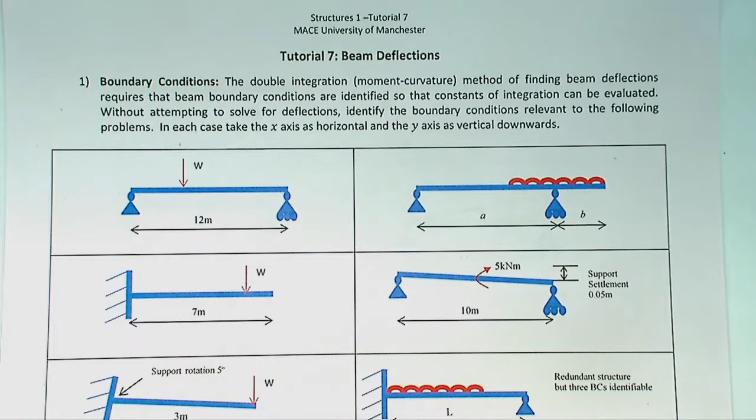Okay, so let's start with looking at the examples from beam deflection. The first set of problems asks you to identify the boundary conditions, because that would be required when we do the beam deflection calculations. So this is asking you what the boundary conditions are in those cases.

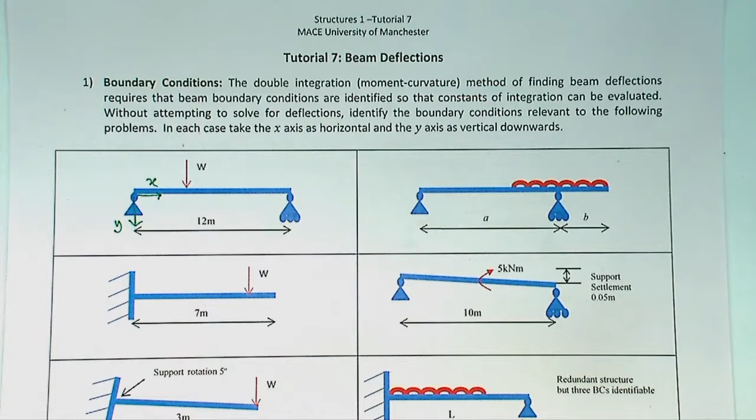So the first problem is asking - you have got a simply supported beam with a load in the span - and it is asking what the boundary condition is. In each case, take x as the horizontal, so this is the direction of x, and y-axis is vertically downward. So this is the axis system for all the cases. X is acting from left to right, y is acting vertically downward.

Now let's have this as an interactive session. What do you think the first case would be? So the first case is shown as follows. So this is the - what do you think the boundary condition would be in this case?

Go on, suggest something. Boundary conditions are determining deflection—both the bending moment and the deflection will be zero at some point. It will be maximum when they're at the very position below, right? But we don't need all of it. We probably need just two displacement type boundary conditions. You are right that bending moment and shear force, if known to be zero at some point, is also a known condition we sometimes use. But in this case, we are looking at where the displacement and rotations are zero—these are the boundary conditions required for this type of problem.

So do you know any displacement or rotation in this case? I'm giving you a clue: at x equal to 0, which is the left hand end, displacement is 0 because there is a support. And at x equal to 12 meters—look at the problem on the other side of the board—at x equal to 12 meters, y equal to 0. So that means the other end is also 0.

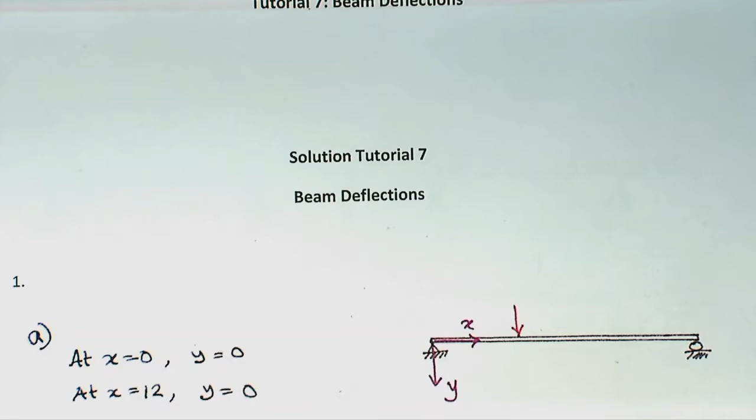What do you think would be the boundary condition for problem number 2, which is the problem over there on the right hand side? What do you think the boundary condition would be? There will be some questions like this in the test anyway, so might as well say it.

What are the known boundary conditions? Any displacement or slope that you know? At x equal to 0, y equal to 0, absolutely. And at x equal to a, y equal to 0. Make sure that you get these ones.

What about the third one? Again, x should start from this end, and y is vertically downward at the left hand end. So what are the known displacement or slope that you know? At x equal to 0, y is equal to 0. That's good—at x equal to 0, that means at the support, displacement is 0 or deflection is 0. What are any other things?

X is equal to 7, but that's going to be the location. There is x equal to the distance between 0 and w, which is at w there will be the highest deflection. Not sure—what about at the free end? If it deflects, it will continue to deflect. Oh wait, the highest deflection is at the free end.

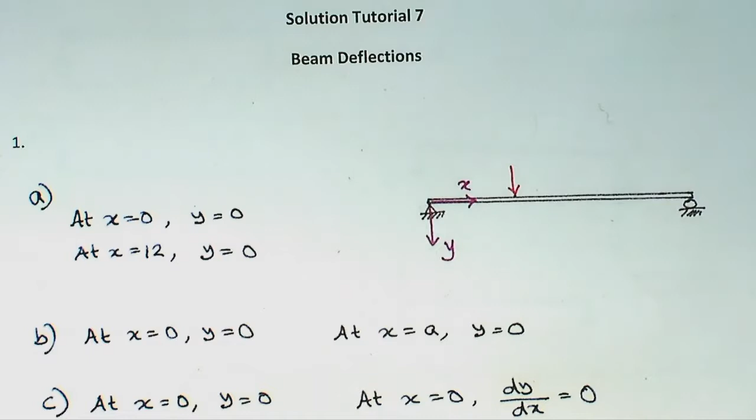Yes, absolutely—at the left hand end and the support, the slope or rotation is 0. dy dx is 0. So at x equal to 0, y equal to 0, as you said, and as you have rightly said, at x equal to 0, dy dx, which is the rotation or slope, is 0. Absolutely right—so a fixed end or a built-in end will have rotation 0. So that's the known condition. Having a maximum quantity would not make sense unless you find out what that maximum value is—you need the known value as the boundary condition. And boundary conditions here we are talking about in terms of displacement or rotations, because that's what we are finding in the deflection equation.

Bending moment and shear force you may know. For example, in this problem on the right hand side, at the free end, bending moment is 0, shear force is 0, because it's a free end—it cannot have any bending moment or shear force there. And you also know the left hand side would probably have the maximum bending moment. But this doesn't help you when you're trying to find the integrating constant from the deflection equations. So go for known places where you know the deflections or where you know the rotation—these two are the things you need to look at in these problems.

Okay, what about problem 4, which is in there? Okay, anybody wants to go first for this problem?

No? So what are the known boundary conditions in this case? Now of course as before, at x equal to 0, y equal to 0. That means there is no deflection due to fixed end. But what about any other conditions?

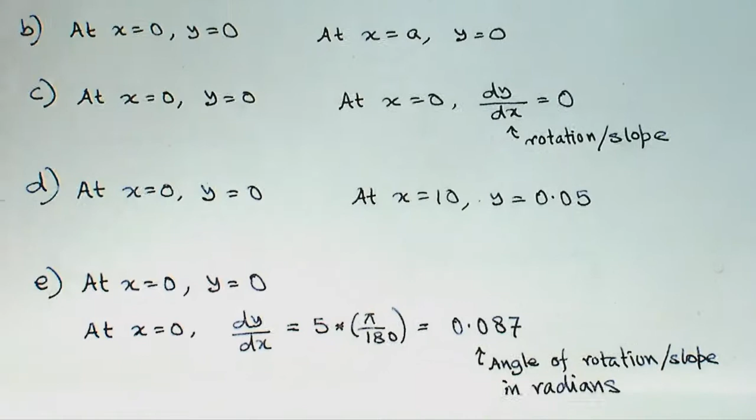Okay. What about problem 6? How many boundary conditions do you know in problem 6? Okay, I want some answer. First one from this side. Okay, anybody from this side, give me a boundary condition.

What do you know in terms of the deflection or rotations by looking at the support structures or the loading or the beam? What do you know in terms of the deflection or rotations? Okay, somebody from this side, okay?

At x equal to 0, at the support, y equal to 0. Very good. Now I go to the other side. You give me another one, okay? X equal to L, y equal to 0, because there is a pinned support.

Okay, middle group, do you have anything else? dy by dx is 0 at x. Okay, dy dx equal to 0 at x equal to 0. So these are the three boundary conditions.

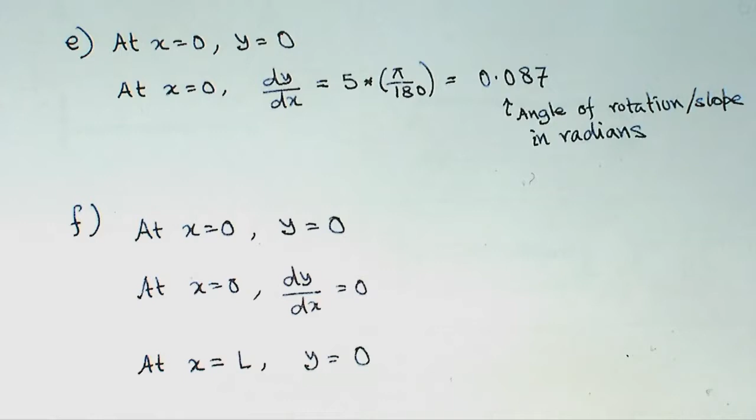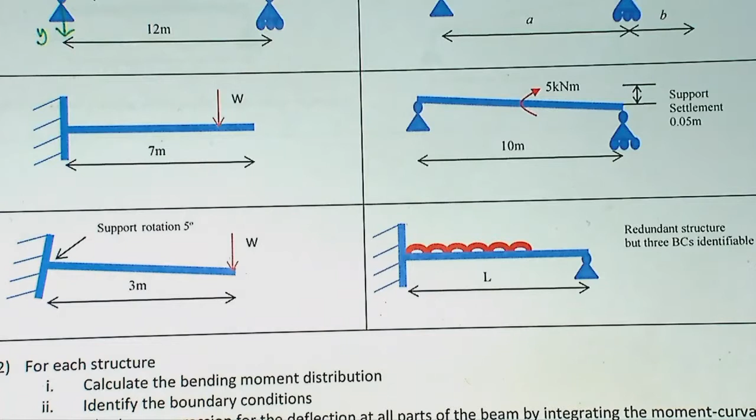So let's look at problem number 1. So problem number 1 is this beam.

Okay, so 2 kilonewton per meter over 5 meter distance. So that's the beam, and it is asking us to find out the bending moment distribution. Now there is only one load, so it is relatively easy.

So I take a section at a distance x and find out what would be the bending moment distribution. Now we know there is this 2 kilonewton per meter load. To calculate the bending moment distribution, I need to find out what are the support reactions.

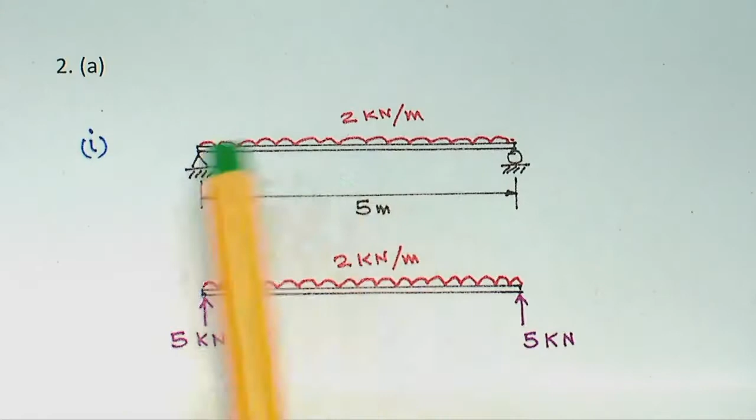So to get the support reactions, we can do a free body diagram and find the support reaction. So the total load is 10 kilonewton - 2 kilonewton per meter over 5 meter.

Total load is 10 kilonewton, and it's a symmetric beam. So half of it will go over the left hand support, other half over the right hand support. So 5 kilonewton each. Now it is relatively easy for me to find out the free body diagram.

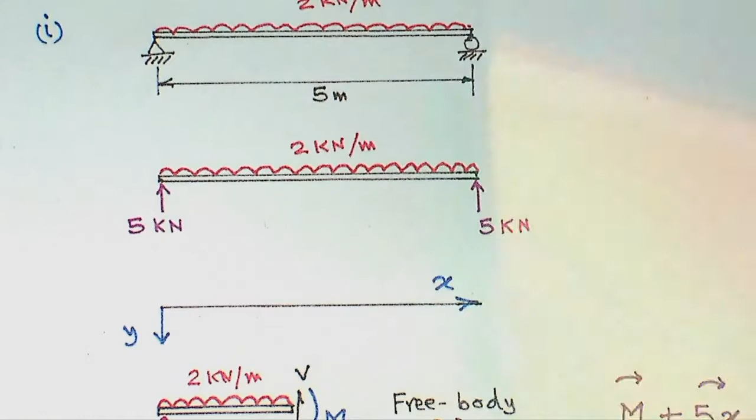We take x going from left to right and y vertically downwards. So if I take a cut or free body diagram at a distance x from the left, say this distance is x and that is 5 kilonewton, and then my shear force and bending moment diagram as shown.

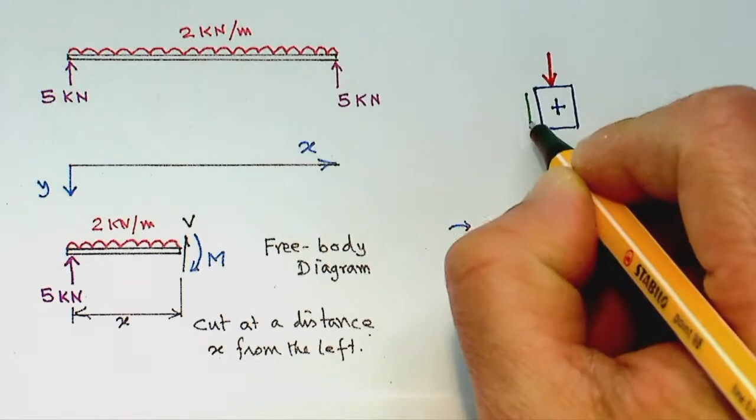Do remember the sign convention we are mostly using in this case. This is an element on the left and right, and the positive sign convention means I will have a load going downward, shear force going down on the left, up on the right, and bending moment we assume a sagging bending moment is positive. So these are the positive sign conventions we are using.

Now, that means on the right hand side I put this shear force going up, that's the right of the cross section, and bending moment in this way. And then I draw the equilibrium equations for this case. So this moment...

Whenever we are doing the equilibrium equations, I can use clockwise or anti-clockwise. When you do the equilibrium equation, summation of moment equals 0, this sign convention does not follow, because left or right is related only to the bending moment, which is internal stress. The internal stress has some form of sign convention like this, which is different from what we do in terms of the summation of all the moments being 0 or not.

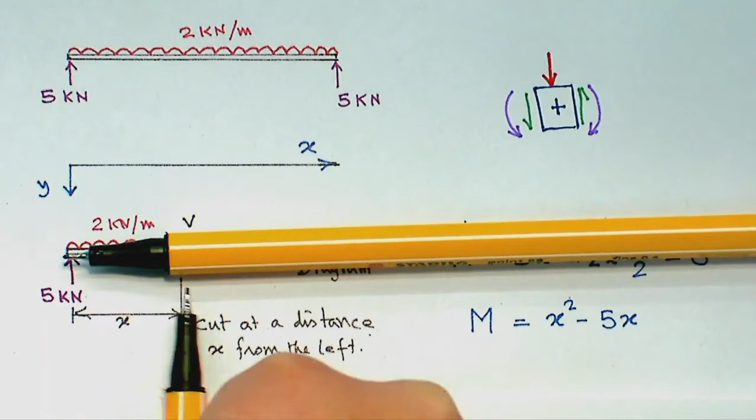So this moment M is clockwise, so I am using a plus sign M. Moment due to the reaction force at the left hand support, I am taking moment about this point, so I hold my bar like that, and consider how this 5 kilonewton is rotating my bar. Consider the pivot point where you are taking your displacement. This is my pivot point, because that's where I am taking the displacement for the moment equilibrium.

So 5 kilonewton load will rotate my beam in this direction, as if going in a clockwise fashion. What is the moment amount? 5 times x, the force times the distance. So that's why with the plus sign, because it is a clockwise moment.

What about this 2 kilonewton per meter load? What is the total load? Total load is 2 kilonewton per meter over a distance x, so the total load is 2 times x. And where does it act? This is a uniformly distributed load, so it will act at half the distance from this side, the middle of this side. So if this is my 2 times x, that will act at a distance x over 2.

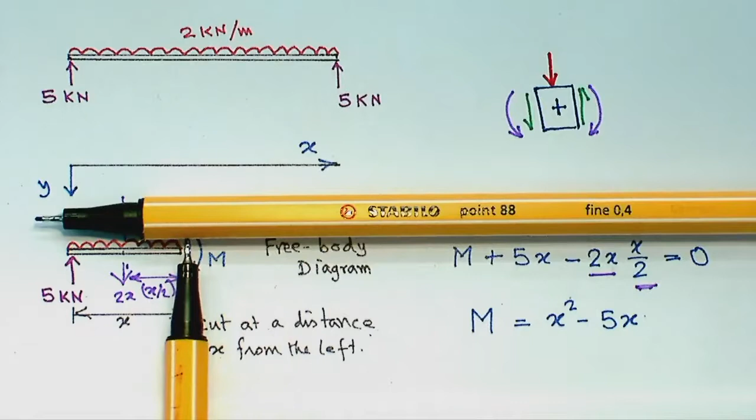Now which direction does it rotate the beam? The pivot point is still there, and this load will rotate the beam in this direction, so this is anti-clockwise, that's why this negative sign. If you do that, then you get m equal to x squared minus 5x.

So that means this expression gives the value of moment at any distance x. Give a quick sense check: if you put x equal to 0, then mx equals 0 minus 0, which is 0. That makes sense, because this is a hinge point, so moment is 0. And also moment is 0 at the other point, because there is also a hinge point.

So if you put x equal to 5, for example, then that will be 5 squared minus 5 times 5, so mx equals 0. Doing a bit of sense check makes sure whether your expression is right or not. You can look at the structure and say that this is the right one.

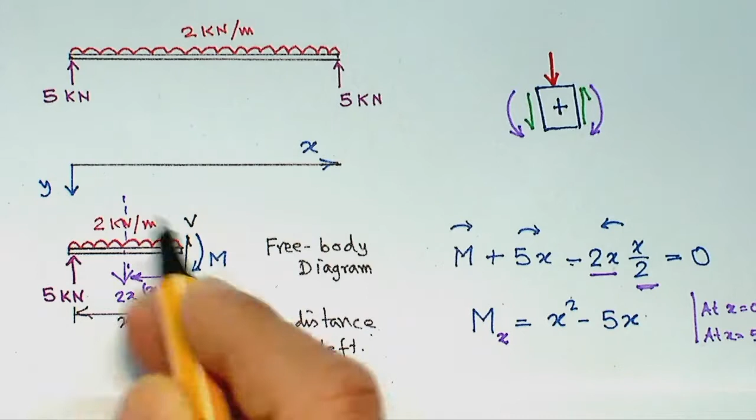Now before going further, if you have been asked to do a shear force expression, how do you do that? So this is the shear force V. You can take an equilibrium equation for this shear force. Let's say positive force upward is positive, because we are doing the equilibrium, so you have to do that. This is the equilibrium of this element we are doing.

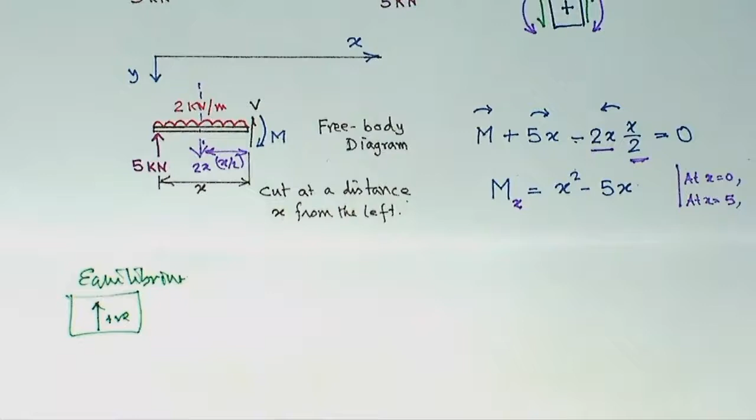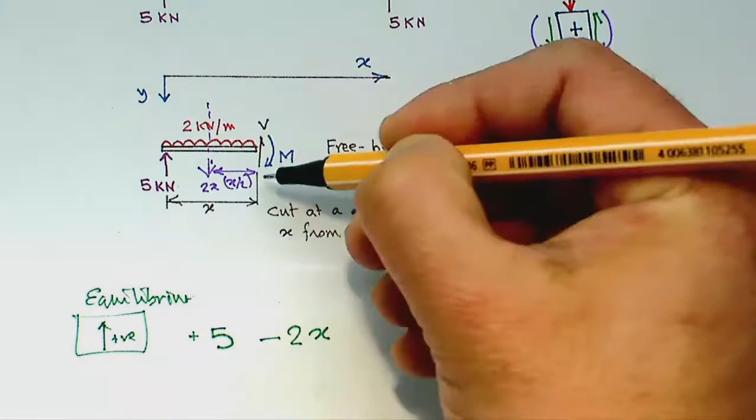5 kilonewton is going upward, so I put that as plus 5. 2 kilonewton per meter is going downward, and what is the total load? 2 times x, so minus twice x. And V is going upward. These are the three forces in this case, so that is equal to 0.

So V at a distance x. If you write it down in a neat way, Vx would be 2x minus 5.

So if you do a sense check, at x equal to 0, Vx will be equal to minus 5. That means over the left hand support, your shear force would be minus 5, and at x equal to 5 meter, Vx would be plus 5 kilonewton.

That means, at x equal to 2.5, for example, half the span, Vx will be equal to 0. So at the mid span, shear force is 0. This is the expression of shear force. I may ask you to find out the expression of shear force as well.

So this is an expression of shear force at a distance x. But this is not required to calculate deflection. So this could be just an expression for you to find out.

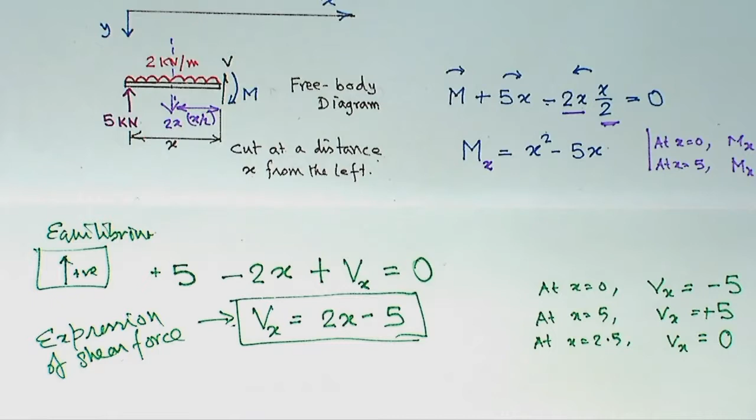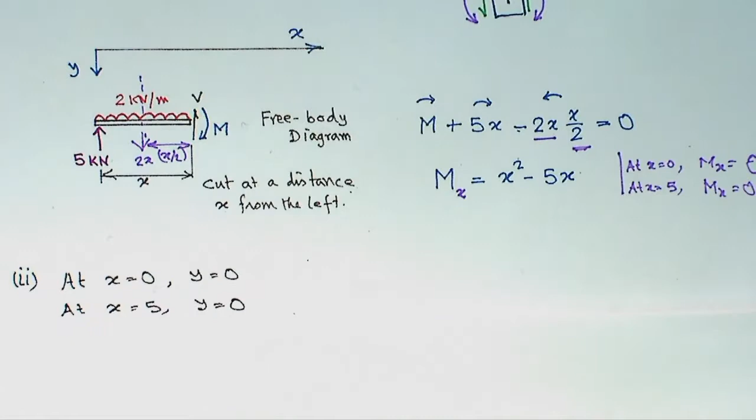So how do we solve this problem? Now the second problem that we have been asked was to calculate the boundary condition. The boundary conditions are: at x equal to 0, y is 0; at x equal to 5, y equal to 0. Third is obtain an expression for the deflection.

So EI d2y/dx2 is M. And what is the value of M? M is, general expression is x squared minus 5x. So we put M as x squared minus 5x.

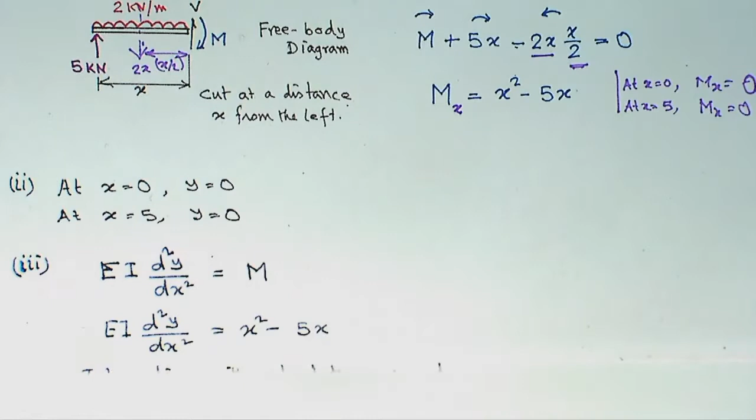And we start integrating. So integrating with respect to x, we get EI dy/dx is x cubed over 3, if you integrate x squared, minus 5 times if you integrate x, x squared over 2, plus c1.

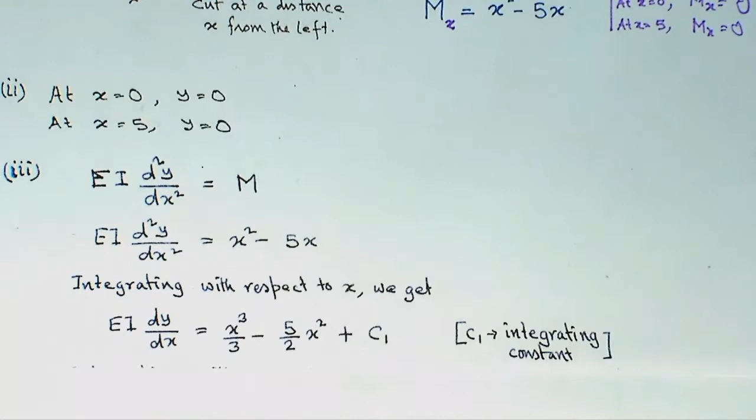c1 is an integrating constant, for example, which we don't know yet. Integrate with respect to x once again, you will get this expression: EI y is x to the power 4 over 12 minus 5 over 6 x cubed, plus c1 x plus c2, where c1 and c2 are the integrating constants.

How do I find c1 and c2? I find c1 and c2 from these two known boundary conditions that I wrote at the top. So I use the first one: at x equal to 0, y equal to 0.

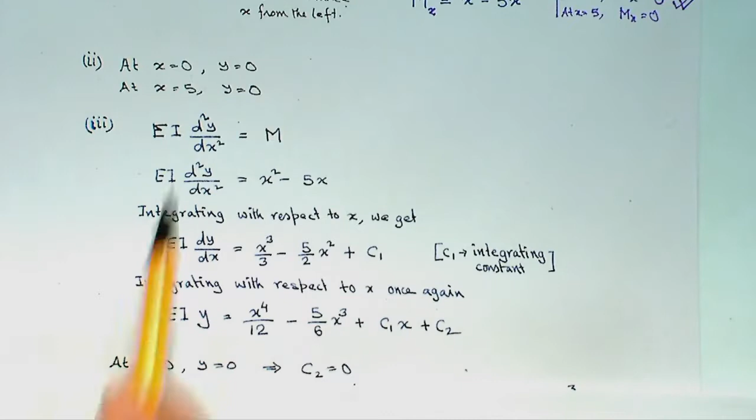So I put that value here. So 0 is equal to 0, 0, 0, etc. So that will give me c2 equal to 0. I use the second boundary condition then, x equal to 5, y equal to 0. Then that gives me the value of c1. So once I know c1 and c2, I write down my expressions of deflection.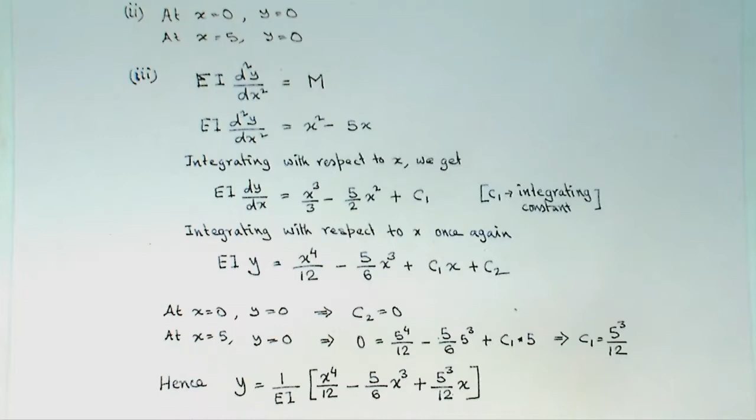So the beam is likely to deflect in this manner, for example like this. So this is the deflected shape. This deflected shape you can find by using this equation.

So you can see if you put x equal to 0, then you find y would be 0. Similarly, if you put x equal to 5, you should get y equal to 0, because that's how you have found c1 and c2. And you can find the maximum one.

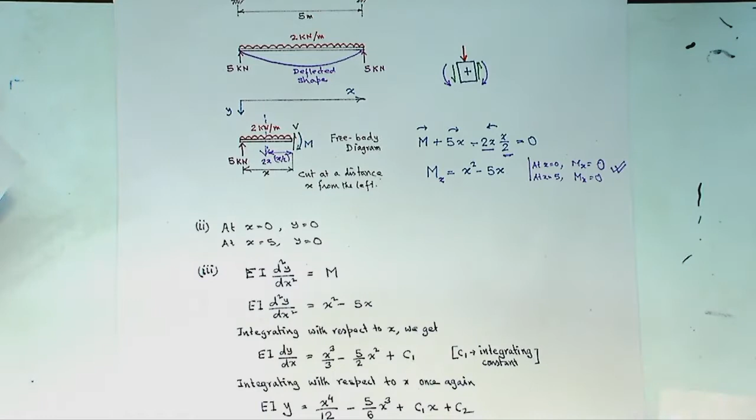And by drawing the diagram, you find that the maximum is at the midpoint, at the midspan. So you put x equal to 2.5, for example, which is the midspan, and that will give you the maximum deflection. So if you want to find out that part, where the maximum deflection would be.

So at the location of maximum deflection, the slope will be 0. Now, of course, in this case, you could use the symmetry and say, okay, midpoint it is maximum, but maximum deflection usually would be related to the slope being 0.

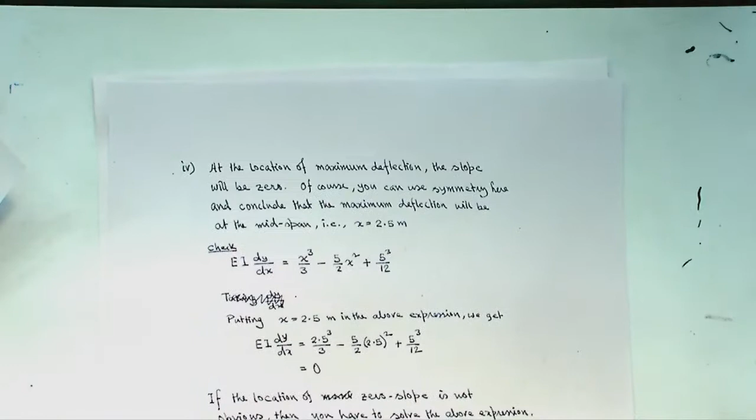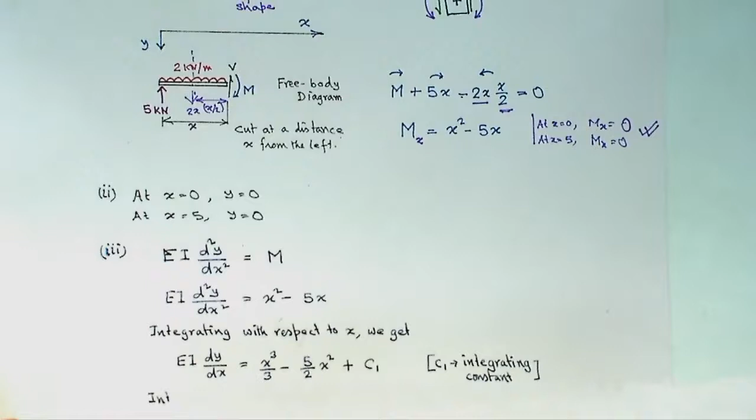Of course, you can use symmetry here and conclude that the maximum deflection will be at the midspan, i.e. x equal to 2.5 meter. So we can check that because we do have the equation of the slope: EI dy/dx is x cubed over 3, etc.

So put values of x equal to 2.5 meter and see whether that is exactly 0 or not, and you will see that it is indeed 0. So at the midpoint, the slope is indeed 0.

So if the location of zero slope is not obvious, say the load was such that you cannot use any symmetry or anything else, then you need to solve this equation in terms of x, put that equal to zero, and find the locations of x where the maximum deflection would be.

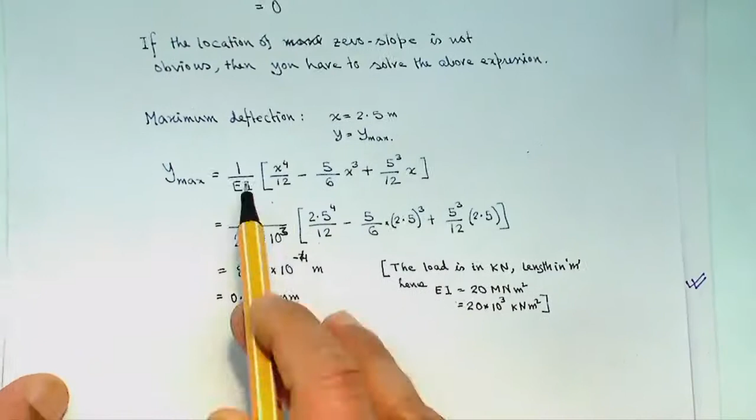So once you know the location, then put the values in and you get the y max. In this case, y max is 0.814 millimeter. Now you need the value of EI, which is given for this problem: EI is 20 mega Newton meter square. So you are getting a deflection, maximum deflection of about a millimeter.

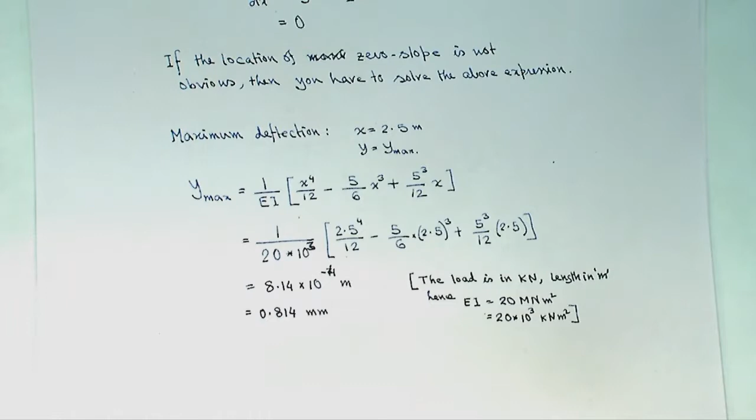Okay, so you can see the deflection is 0.8 millimeter. Now just to put this in context, the assumptions we take are that it is a small deflections problem. The way I have drawn it here is not to scale, of course, because the span is 5 meters and the deflection is 1 millimeter. So that is a very small deflection, and 2 kilonewton per meter is not a small load.

So 2 kilonewton is approximately 200 kilogram of mass per meter length. For example, two people standing half a meter apart, each weighing 100 kilogram. So that's a load. Yes.

I've got a question, I've had this thing squeaking in my mind for days. EI's value. Prove me wrong here. Do you think we should convert EI to kilopascals first before putting it in? No, you use any unit that is consistent.

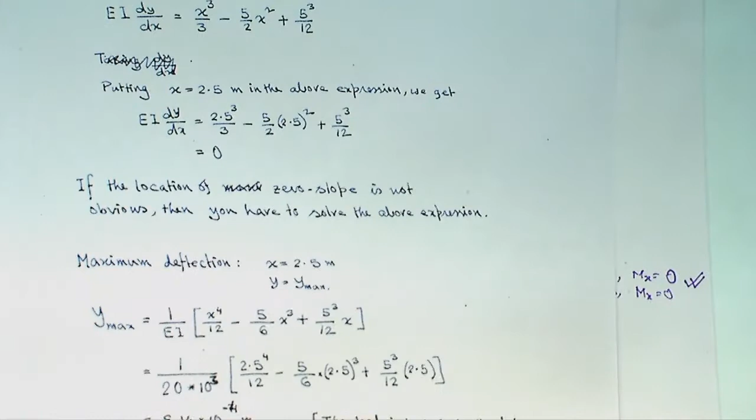So the load is in kilonewton and length is in meter. So I used, in this case, meganewton meter square converted to kilonewton meter square for this problem. Other option is to convert everything to Newton and meter, for example, or Newton and millimeter, but use consistently the same unit for everything. So in this case, as the problem is given in kilonewton and length in meter, I converted EI to kilonewton meter square.

So in this case, are we not considering the self weight of the beam? No, the self weight is possibly taken within that 2 kilonewton per meter. So if there is no uniformly distributed load and we have to consider only the self weight, can we consider self weight as a UDL? Yeah, absolutely.

So the self weight could be included, taken as a UDL, and of course then your inherent assumption is that the cross section does not vary along the length, or it's a prismatic beam, because if that varied, then the self weight would also vary and it wouldn't be uniformly distributed.

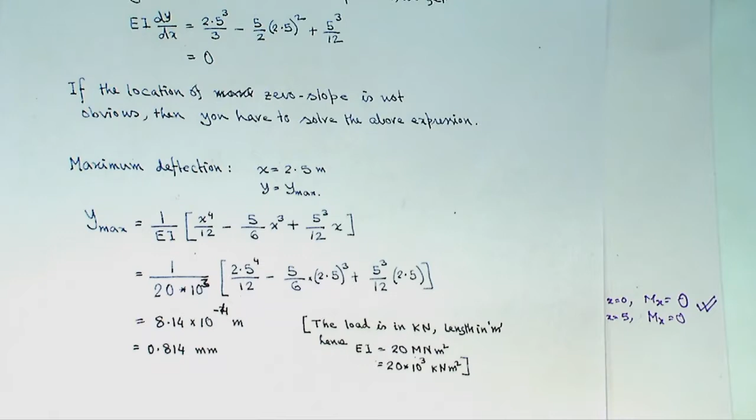Any other questions on this problem? No? Okay, good, so that was problem number 1.

What about problem number 2? Problem number 2 is this problem B here. Why is that given in terms of A? Okay, so no value is given, but it's done in terms of A. It's not to worry. So this is the problem that is given.

The first thing it asks us to find is the bending moment distribution. So what do we do? We first need to find out any unknown support reactions. So draw the free body diagram of the whole beam and find the support reactions.

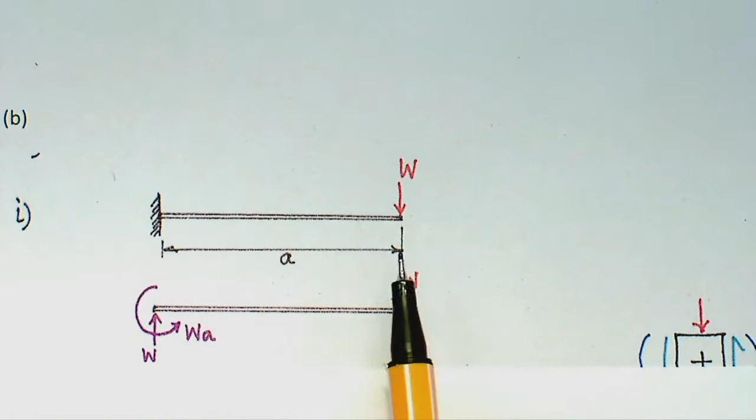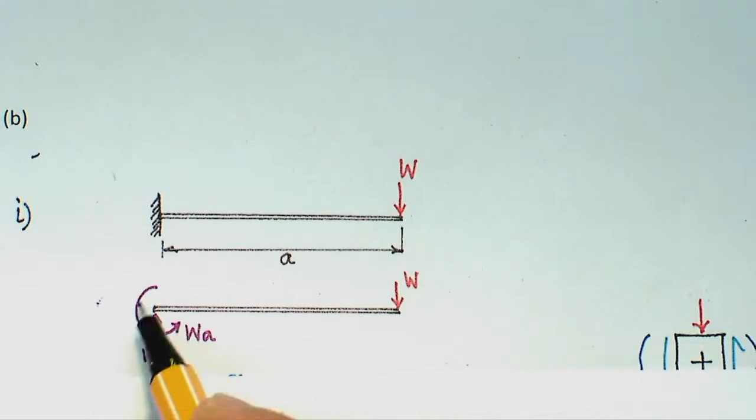If you draw the free body diagram of the whole beam, you will have an unknown reaction force at the support and an unknown moment. If you do the equilibrium, the summation of vertical forces shows that the reaction force going up is W, and the support moment would be W times A. Why is that? Because the load at the free end creates a clockwise moment W times A, which must be balanced by the support. So the support moment must act in the opposite direction, anti-clockwise, and must be W times A.

Now you probably haven't done many of these cantilever problems, so make sure you familiarize yourself and do some more. In first year, mostly you will get either the simply supported type or the cantilever type, and in some cases an overhang, but you wouldn't get any statically indeterminate structure. So these are primarily the two types of structure. Make sure you are familiar with both sets, a simply supported or a variation of it, or a cantilever. Cantilever could be vertical as well as horizontal.

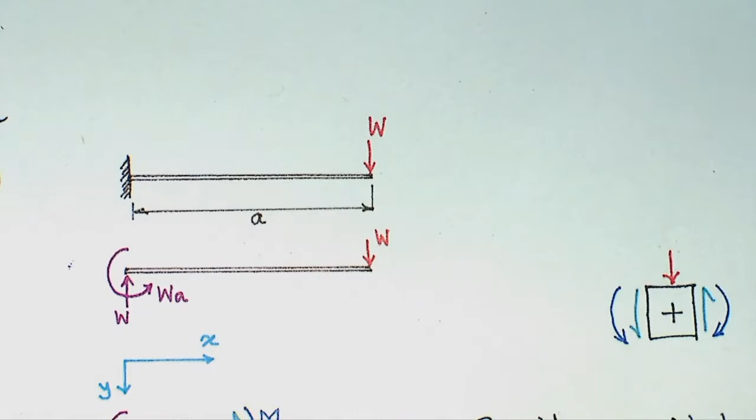So the shear force diagram for this, if we take a cut at x where x is less than a, the shear force diagram is going to be V plus W. So why don't we do the shear force diagram? Let's say I take a cut at a distance x, something like this. Then I have got a shear force V going like this, and a moment.

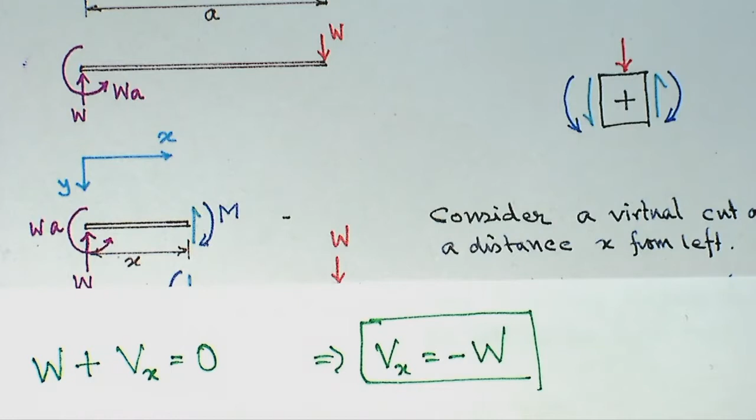As soon as I make a cut, a moment acts in this way. So what is the shear force? Now the shear force comes from vertical force equilibrium. W is upward, so that is W going up, and shear force according to my sign convention is also upward. So W plus V at x equals 0, which gives Vx equal to minus W. So that is my shear force expression. It will start with a negative value at x equal to 0 and continue, because this does not depend on any x value. So the shear force for this beam would be continuous at the same value, negative W, throughout. So this is the shear force diagram.

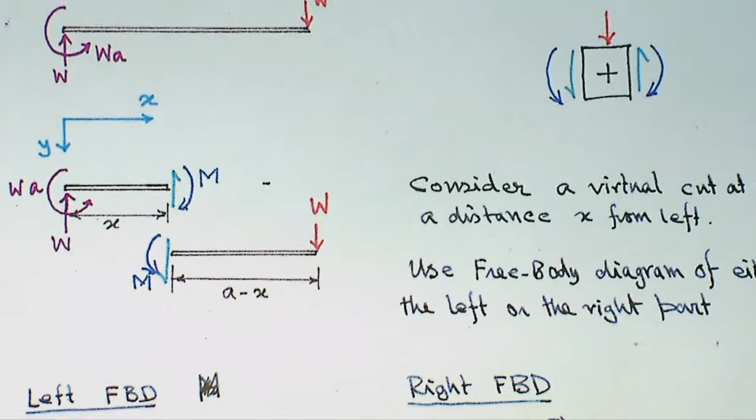Now what about the moment diagram? Consider a virtual cut at a distance x from the left. Use a free body diagram, you can do either the left side or the right side, as I have shown here. Let's say you do the left side equilibrium analysis, which means you are only considering this side. If you do that, you have a moment going clockwise, M, W times x going in this direction, and W times a at the support in the negative way, so minus Wa equal to 0.

What you will find in first year structures is that you really need to grasp two things well to do any of these problems. One is the idea to draw the free body diagram - if you make a cut, you replace the physical support with an equivalent force that it may provide. So the idea of the free body is absolutely important. Grasp that concept by looking through problems, reading a book, or trying to resolve an unknown problem, for example analyzing this pedestal. Try to draw and think about the free body diagram - that's the first thing you need to do.

The second thing is applying the equilibrium equations: summation of horizontal forces equal 0, vertical forces equal 0, or the moment of all the forces equal 0. If these two concepts are clear, there is no problem in first year structures - just these two concepts: how to draw the free body diagram, and the equilibrium equations.

This is all the things, everything that you need to know in first year structures. And we haven't done anything more than that in this whole 10 weeks so far. We have used this concept again and again for the whole structure, to a little bit of structure, to some bigger part of the structure, just these two concepts consistently from one to another: free body diagram and equilibrium equations.

So the moment at a distance x is w times a, times... if you take w outside, w times a minus x. Now what about the right hand side?

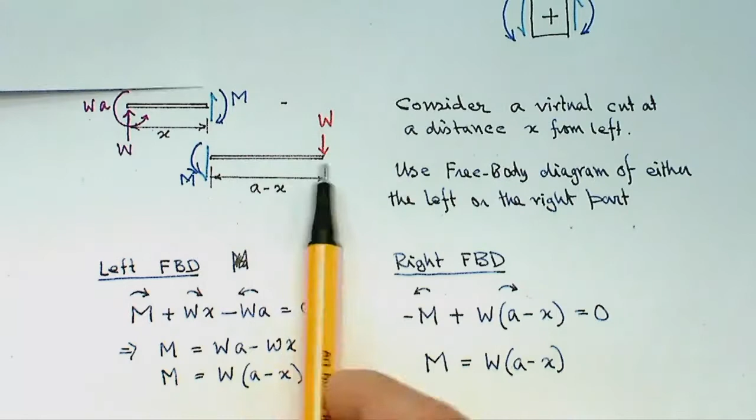If you took the right hand side free body, then of course the support is not there. Now if m goes that way, this is the left side of this cross section, so the shear force should go down and moment should go that way. So if you take moment about this point, you have got m, which is anti-clockwise, so minus m, and then moment due to w, so w times a minus x. So this also gives you the same expression, that the moment is equal to w times a minus x.

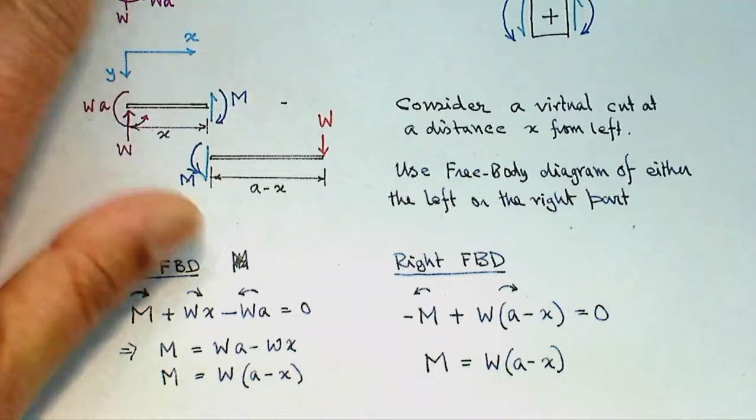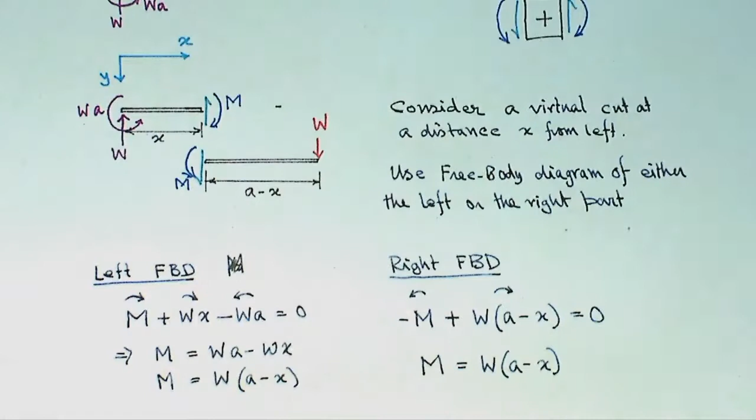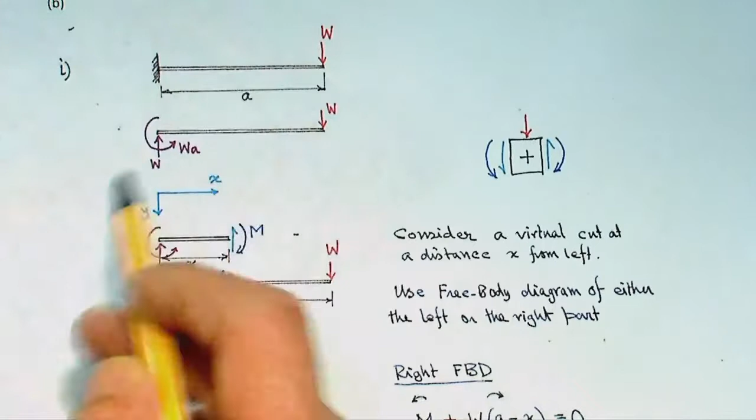So it really doesn't matter which side you take the moment from, whether you take the free body diagram of the left hand side of the beam or the right hand side of the beam. Now of course in this case, the right hand side of the beam would have given you a little bit of advantage, because you have got only two forces to consider for the moment, w and m, whereas on the other side you need to consider w times a. It is also useful because you didn't need to consider the free body diagram of the whole beam, or find out what is the moment at the support. If you only consider the right hand side, you didn't need that second step. So sometimes doing equilibrium of the left or right depends on one side being more advantageous than the other. In this case, just doing the right hand side would have saved you that second step of calculating the support forces.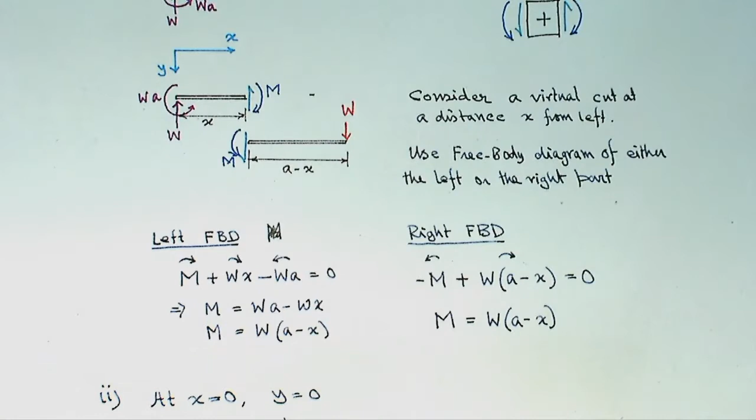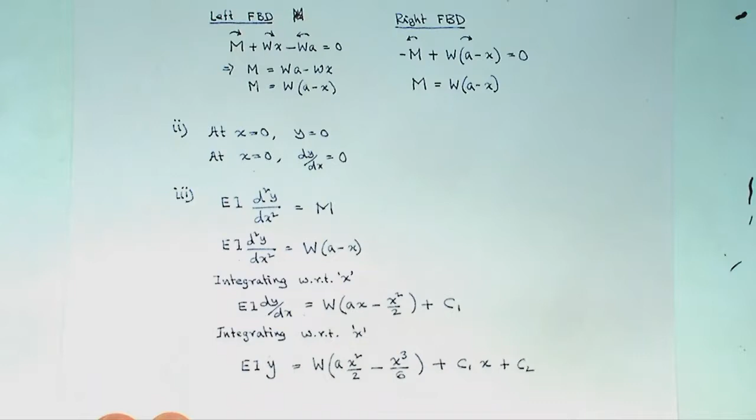Now the rest of the steps are very similar. So what you do is equate EI d2y dx2 equal to m. So EI d2y dx2 equals w times a minus x, and then you integrate with respect to x to get this expression with integrating constant c1, then integrate again with respect to x to get the expression for EIy. Then you go back and put in those two values: x equal to 0, y equal to 0, and x equal to 0, dy dx equal to 0. That would give you c1 and c2.

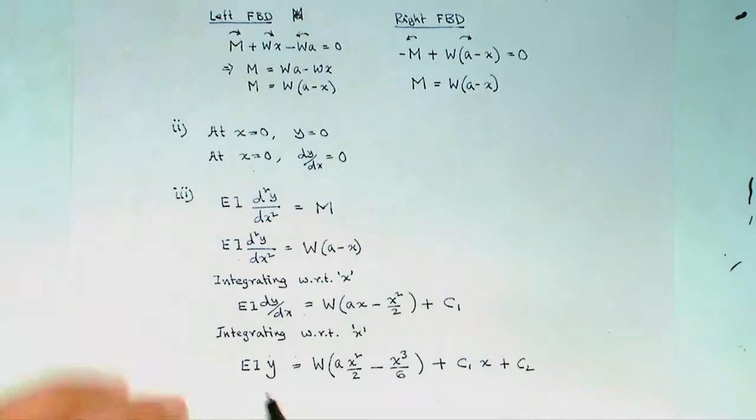Now, of course, you can get those two by putting in the values of x and y here. So from these expressions, if you put x equal to 0, y equal to 0, you'll get c2 equal to 0. And if you put x equal to 0, dy dx equal to 0, you'll get c1 equal to 0 as well. So putting back the values of c1 and c2, y is given by this expression, that's the expression of the deflection, and this is the expression of the rotation.

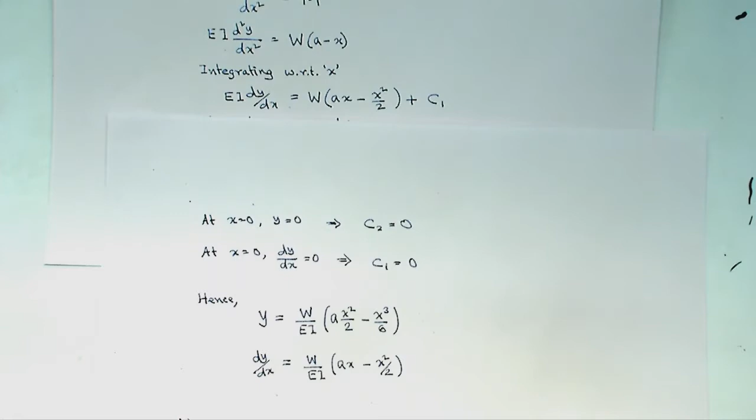Okay, so that completes part 3. What about part 4? Maximum deflection. Now, in this case, you may say, the beam is in this way and the load is in that way, so my deflection is going to be something possibly like this. So I am expecting my maximum deflection would be at the free end, so that would be delta max.

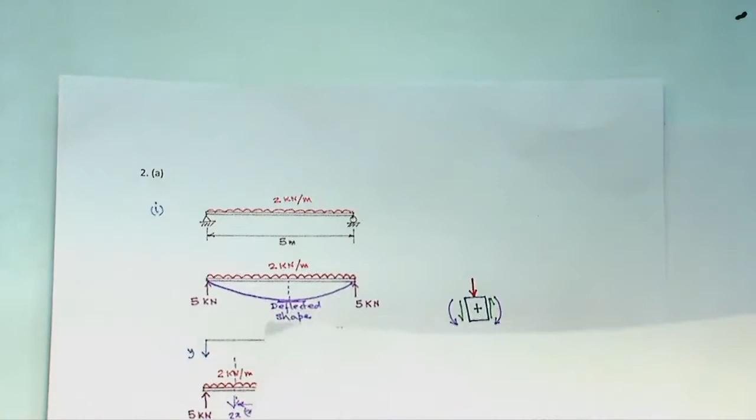Remember in the previous case, what did I say? I said, in that case, the maximum deflection will occur where the slope is 0. Is this true now? No. The slope is 0 here, deflection is 0 there. Deflection is maximum at this point, the free end, where the slope is not 0. So did I say something wrong here? That is clearly the case: the slope is 0, deflection is maximum — what happens when I went to the cantilever case?

Let's say we know maximum deflection is at x equal to a, so maximum deflection will occur there. You put the values of y at x equal to a into this expression: a times x equal to a, a square over 2, a cube over 6. So y max is w times a cube over 3EI.

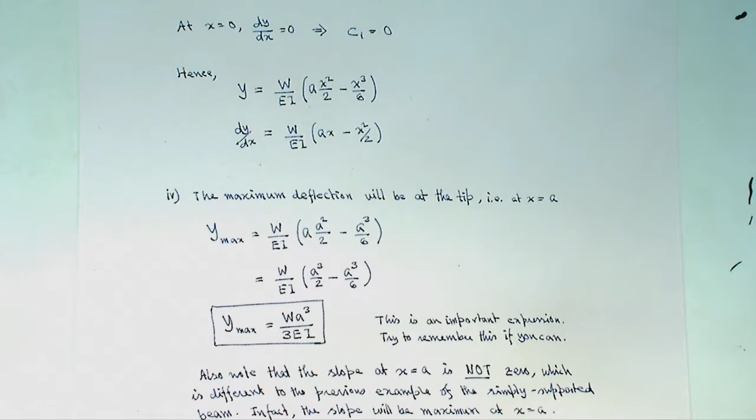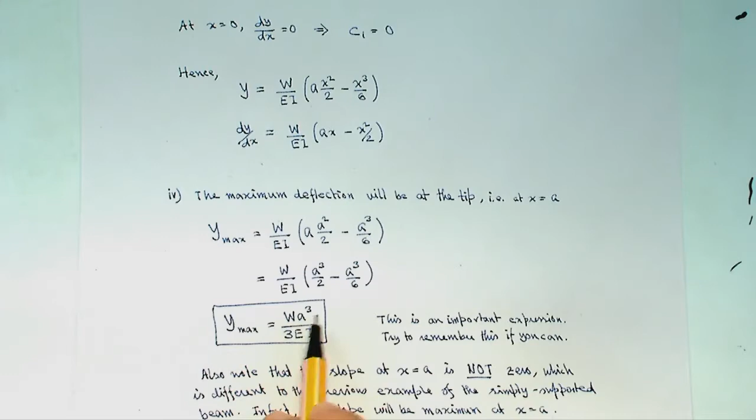This is an important expression because in many cases you will get a problem of cantilever type, or you can convert any other beam into an equivalent cantilever. Although in real situations you'll have this as a data table, it's useful to remember that maximum deflection of a cantilever beam is the load at the tip times a cubed, which is the span in this case, over 3EI.

Now this is the question. Also note that the slope at x equal to a is not zero, referring to the previous example of the simply supported beam. In fact, the slope will be maximum at x equal to a, so you can see the slope is maximum at this point. Question is why - think about it.

While drawing the SFD or BMD, should I consider only the mid plane or the entire beam, because the tension is acting only along the mid plane? No - the tension will create a bending moment along the whole beam length, so you need to consider the whole thing, like a cantilever.

For the test this Friday, is it on lecture notes 4 and 5? It will be on stress, beam deflection, and also the second moment of area - so 5, 6, and 7. That's tutorial sheet 5, 6 and 7. Also lecture notes probably 5, 6, and 7, isn't it? There's something on thermal capacity too. Yeah, that will be there as well.

I don't understand this question - why is M negative here if the sign convention says it's positive? That's the sign convention for bending moment, which is the internal one, and this is where we are doing the equilibrium. When you do equilibrium of the whole part of the structure, you should use either positive as clockwise or anti-clockwise. Same for shear force - when considering equilibrium as a force, either vertically upward or vertically downward.